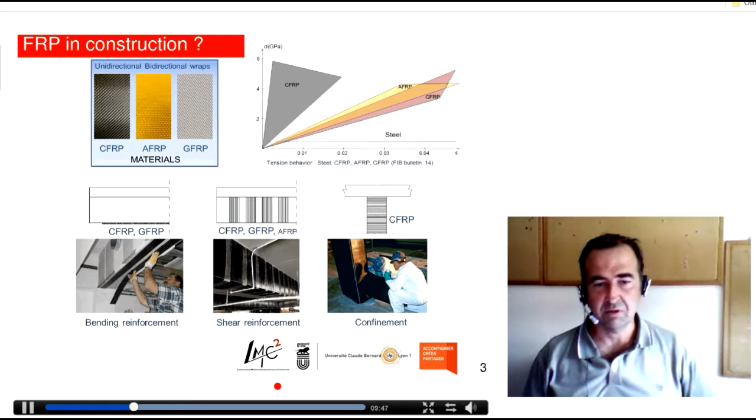So FLAX fibers are natural fibers and can be compared to some industrial ones that we all know, such as carbon, aramid, or glass fibers. The question we had a few years ago was to think about using these natural fibers instead of these well-known industrial fibers to strengthen structures for flexure, shear, or confinement. This was the aim of our research in this project.

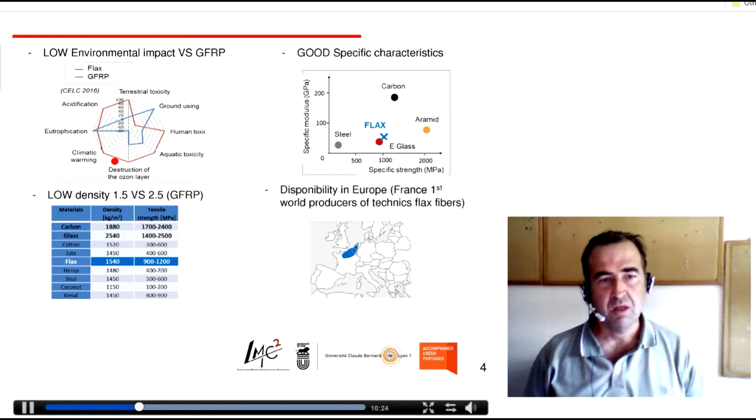So FLAX fibers, if we compare them to usual fibers, may be mainly compared to glass. If we look at the specific modulus, they are very light, a little less high with about the Young's modulus, but the specific strength is very high. Then, of course, they are less toxic and more friendly for ecology, since they are natural and produced very easily.

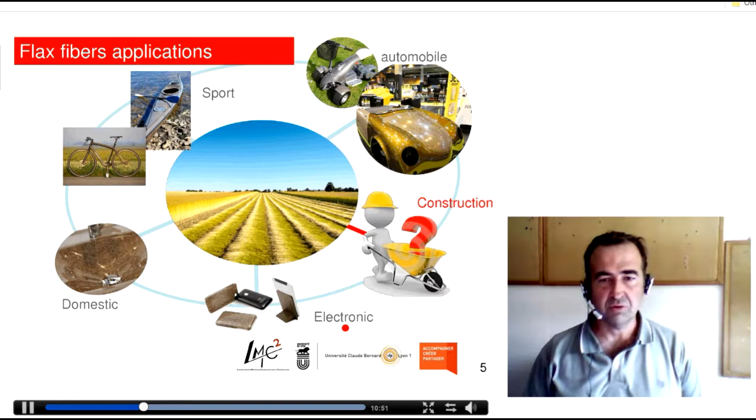Nowadays, these kinds of fibers are already used. There are some companies in France promoting this use in automobile, electronic devices, some domestic use also, and sports areas. Our aim was to think about using them in the field of construction.

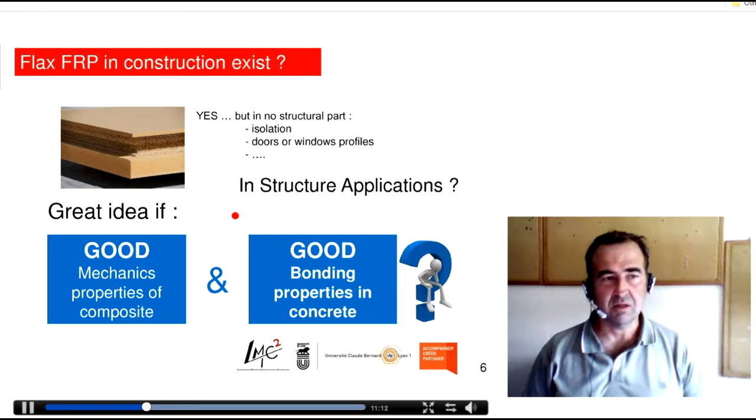So FLAX fibers can be good also, already used for insulation in this field, for doors or windows profiles - they are very light, used with thermoplastic matrix. But for structural applications, there is not so much use in this field.

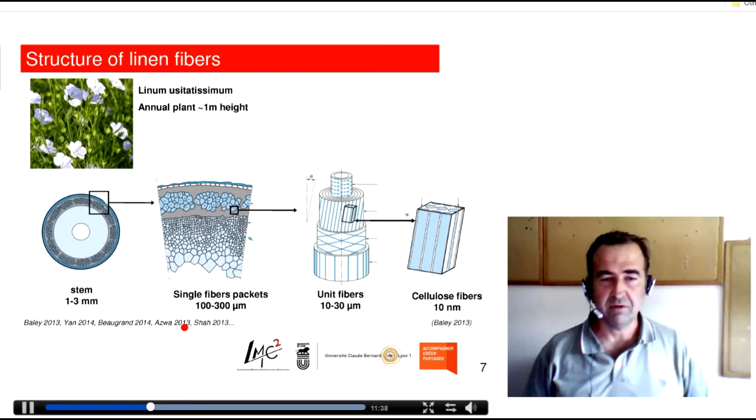These natural fibers are very specific and are already well known, for example, by Baley in the literature review. They are maybe compared with wood fibers. They are cellulose fibers, and this will modify their mechanical properties, and we will see this later in the webinar.

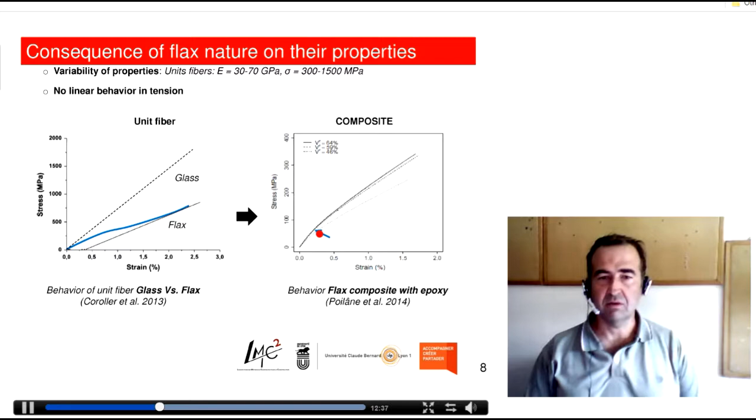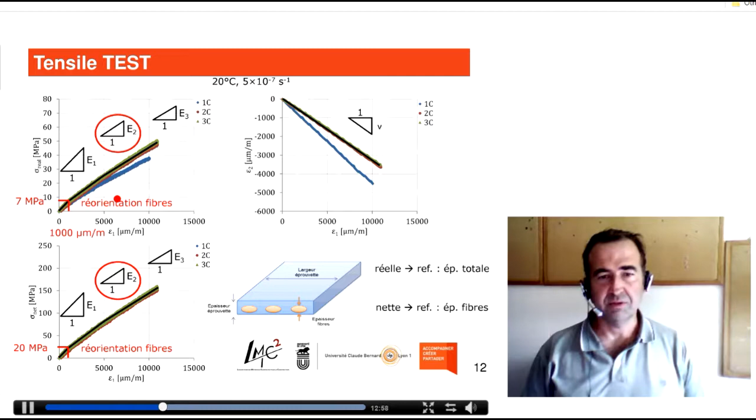What we've seen about the first part of the test we developed in the lab was to confirm this two-stage behavior for the FLAX fibers, and we also obtained several interesting results that I will develop.

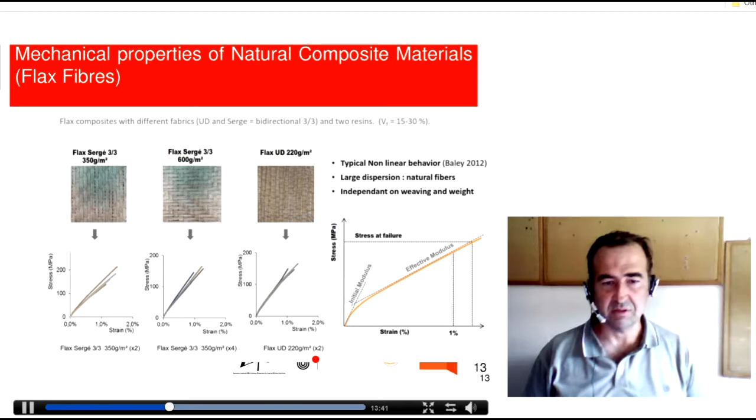All those fibers have been applied by hand layup method, and the global amount of volumic content is 15 to 30%. This is some photos about how the fibers look like, and what we get at the end is a Young's modulus about 11 gigapascal and a tensile strength about 170 megapascal.

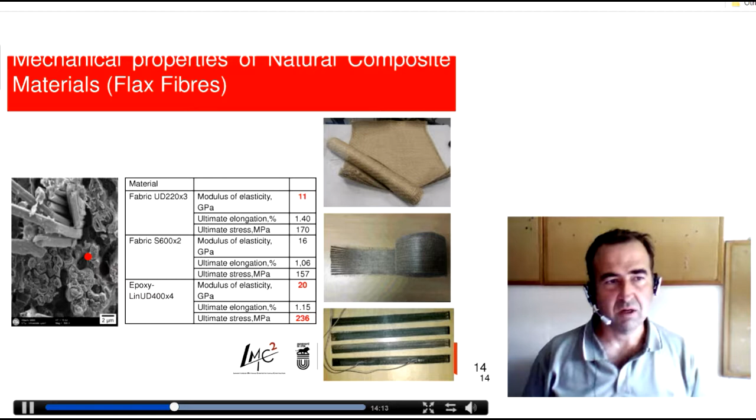You observe here that some debonding may occur of those fibers, and this obliges us to use two epoxy systems, one with a high viscosity and one with a low viscosity, allowing to bond this onto concrete.

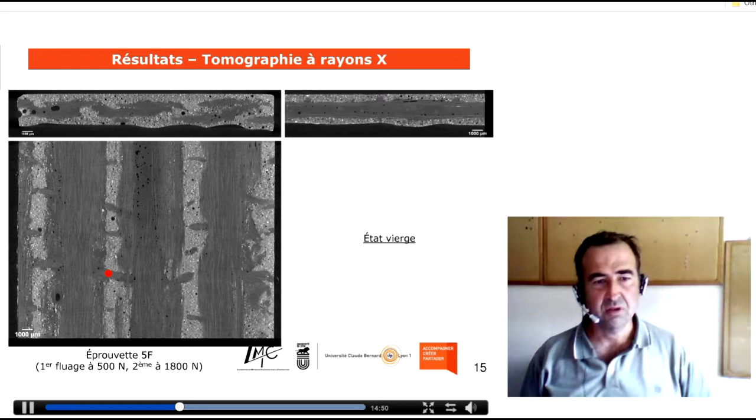If we use some specific way in order to look at what the composite looks like, what you can observe is that due to the hand layup method, there are a lot of voids in the composites, but you can also observe that many of the fibers are impregnated by the resin thanks to this system of two polymers - the first one which impregnates the fibers, and the second one which allows bonding the fibers onto the concrete.

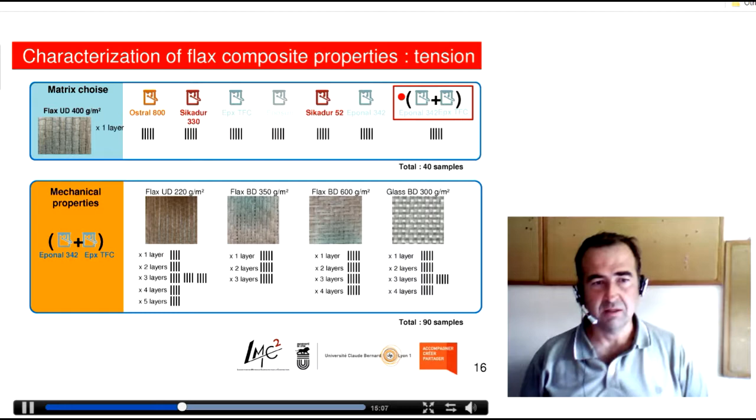So here you have several epoxy systems that we have tested in order to get different layers and optimize the best one. This was at the end the best system from which we get the mechanical properties, the higher one - mainly the different tensile strength. One first objective was to, depending on several layers, compare the different strengths we may have.

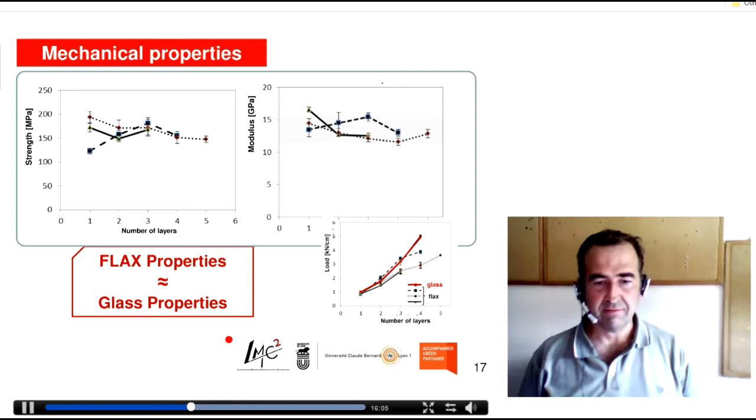What we observed is that we had tensile strength nearby 150 megapascal and the Young's modulus about 15 gigapascal. So in first conclusion, what we can observe is that flax fibers may be more or less comparable to glass fiber properties. If we observe here, this is very light glass fiber, about 300 grams per square meter, compared to the flax fiber composite we have in our study.

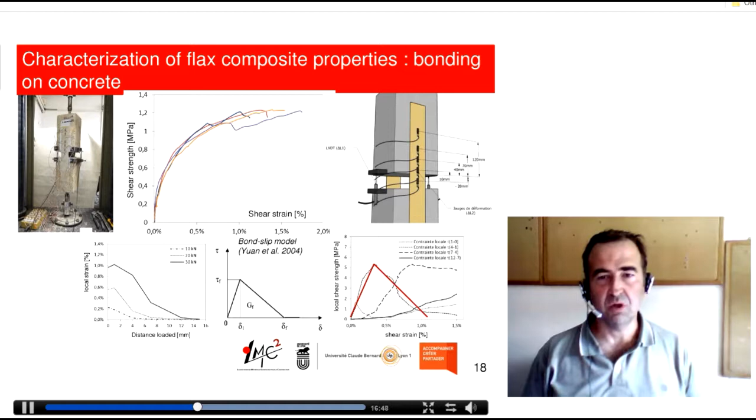Next stage was to evaluate how these flax fibers can be bonded onto concrete using this specific two-component matrix polymer used in our research. So we use a typical double lap shear test, and we obtain shear in function of bond slip. We can observe the local strain distribution, and then we compare this to usual local bond slip models obtained in literature. What we can say is that more or less the behavior is very similar to the one we can obtain with glass or carbon fibers, just the mechanical properties may change.

For example, what we compare is the ultimate load in function of the experiments we have, and compare this to the different models proposed in literature. Of course, we have to fit this since mechanical properties are a little bit different, but if we fit this, we are able to get more or less a very nice calculation of the ultimate load.

These have already been published by Lyon, one of my PhD students, in Composites Part B, and this is the title of the paper. You may find all the details about these experiments there.

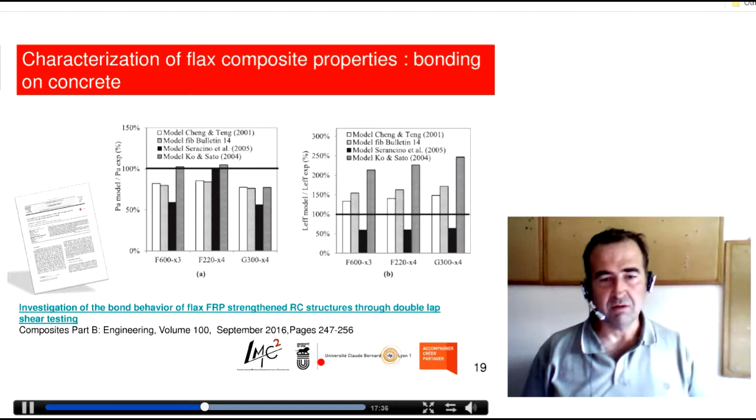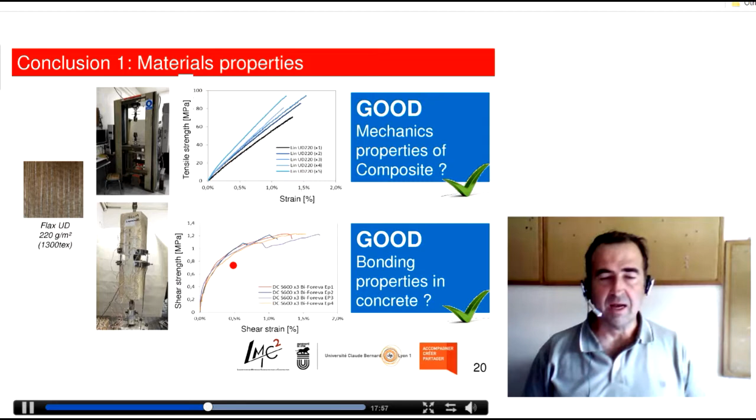So to conclude this first introduction, what we can say is that the properties of flax fibers, if you develop the composites well, may be very nice and comparable to the ones we have with glass. Bond is not a real problem on concrete, and we can develop higher levels of strength onto the concrete and low levels of sliding, so the behavior may be very interesting.

So the next stage may be to do the tests at the scale level of the structure. So in a second PhD, what we've done is a first study about shear strengthening.

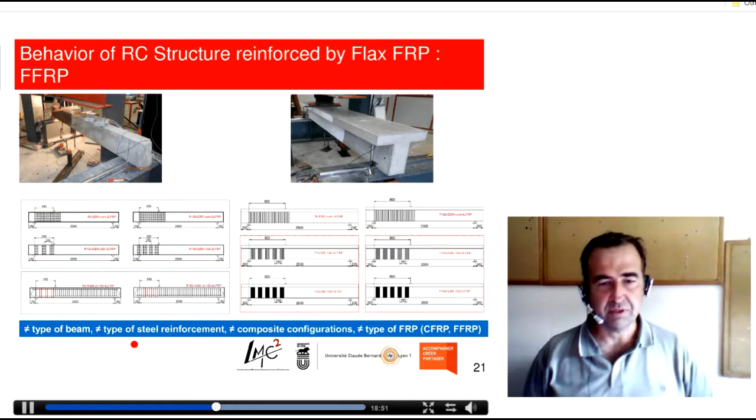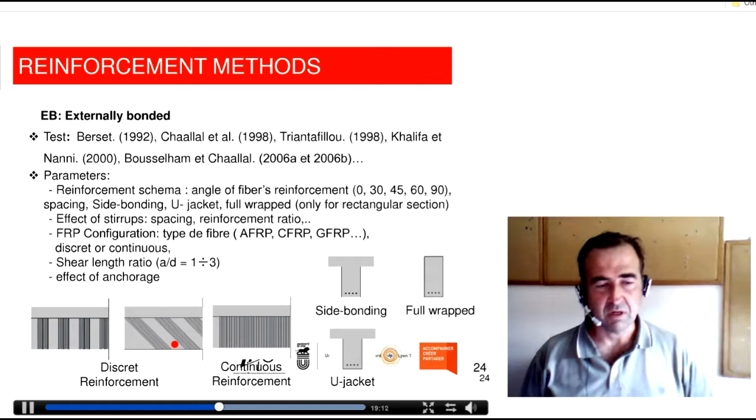We used two specific systems, a rectangular section and a T section, in order to evaluate the variability. We tested several different specimens, different spacing of the flax fibers, different width, and also a continuous strengthening, and we'll compare this to the carbon method. You all know that there are different strengthening systems, and in our study we mainly focus on continuous strengthening. We didn't focus on different inclinations or NSM techniques.

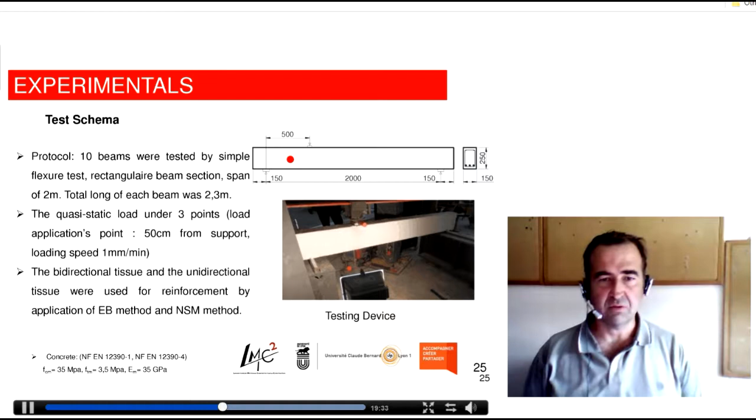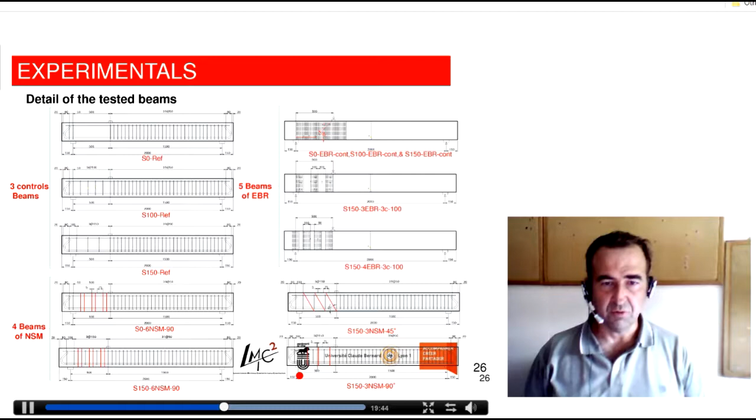So more details about the specimens we tested: 10 beams, 2 meter span, have been tested, loaded in this way such that we have a high level of shear loading in this area and less in this one, so that the shear failure occurs here. You have all the details about the strengthening in this slide. Of course, more detail can be obtained if you just send me an email.

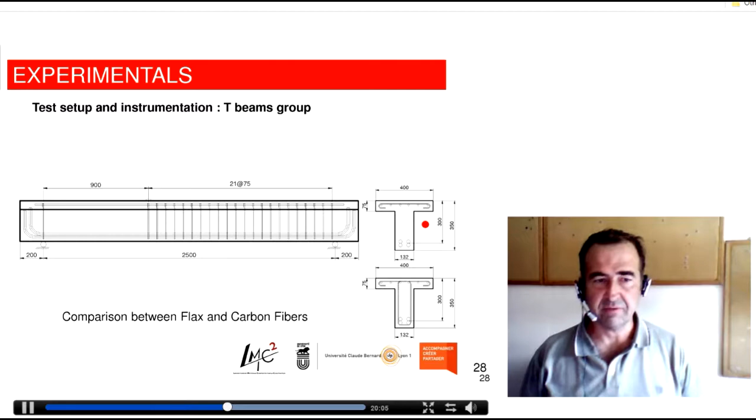We also evaluated the T section. For this one, it was a 2.5 meter span. The idea was to see the problem of debonding and to get a higher depth beam in this area.

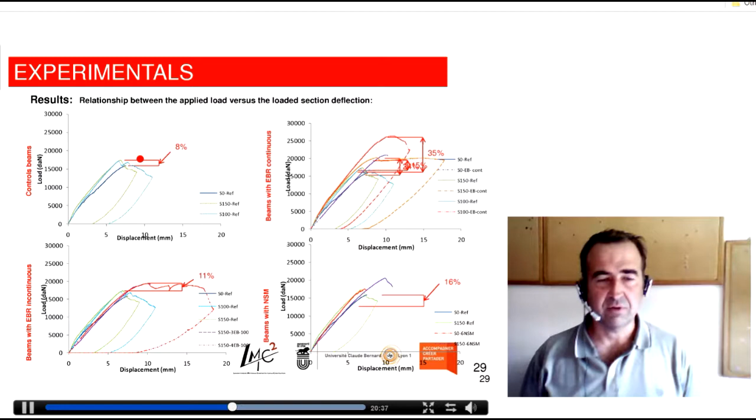As a result, if we compare the reference one and the strengthened one, what we can observe is that with continuous strengthening, the increase in strength is more or less very interesting, about 30% increase. But if this continuous strengthening is used with a very light, only one layer, the amount of increase in ratio is very low.

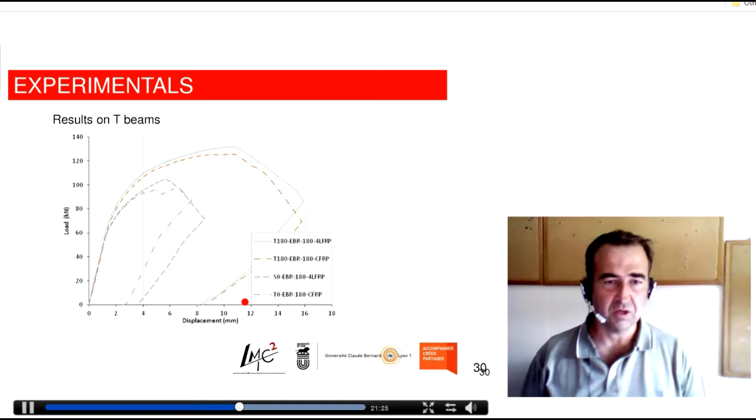And for the T section, what is very interesting is to see that this is the unstrengthened specimen with brittle behavior, and this is the strengthened one with external bonding with a thickness of 3 millimeters of flax fibers and also a width of 180 millimeters. What is interesting is to see that we obtain a very ductile behavior. The shear failure was not an issue anymore in this strengthening, and we increased about 40% of the ultimate load capacity of this beam.

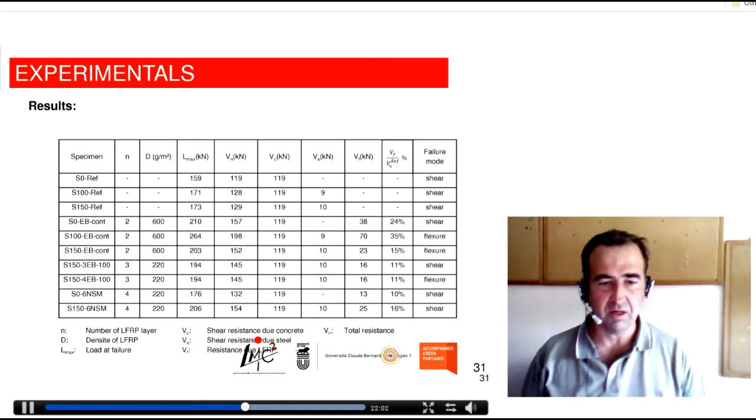And in some cases where the strengthening is very light, what we get is a very low level of load increase, less than 10%. Some photos about the shear failure.

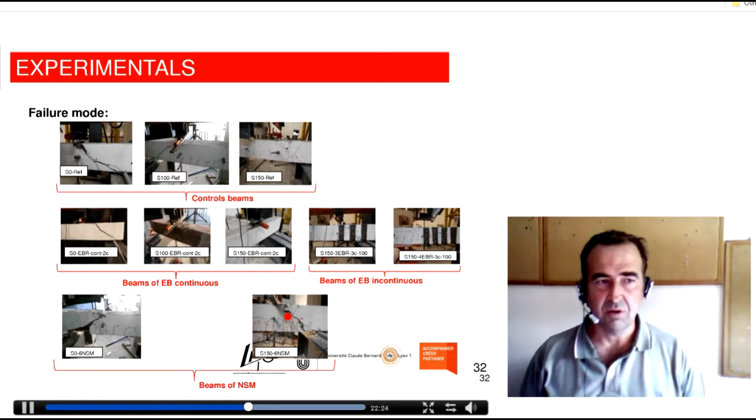You can observe here the cracking, specific shear cracking we have in different specimens. And one thing that is very nice to see is that we didn't get flax debonding, but we've been able

to get the failure in tension of the flax fibers. We then compared these results with different ones coming from literature, using CSA, ACI, FIB, or CNR bulletin, and the failure we expect to get with the flax fibers using the mechanical properties.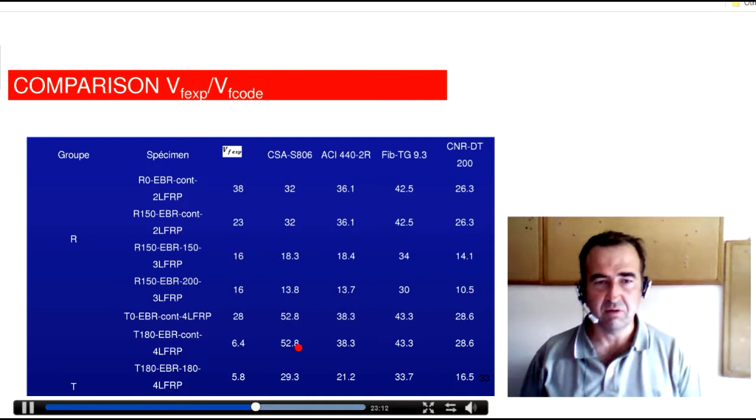And in any case, more or less only with the FIB bulletin, the estimation is very nice. With this calculation method, the load expected is higher than the one we get really in experiments. But in most of the cases, generally, the level of load is calculated as the one we have with carbon

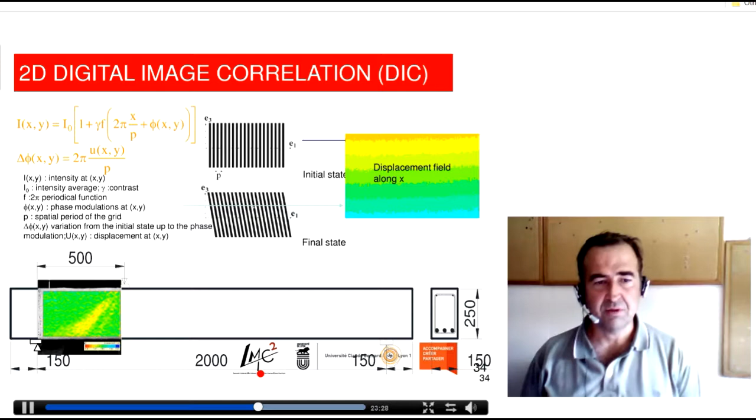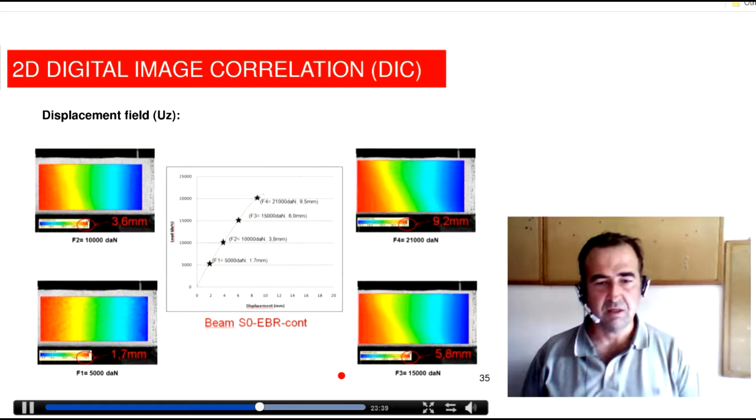fibers. So in order to better understand how the strain is distributed in the flax fibers, we use a DIC method in the cracking area. In this way, we are able to get strain and stress curves for different levels of load, obtaining in that way the different cracking pattern.

So what you observe here is we compare this also with strain gauges locally bonded onto the FRP system. And what you observe is that cracking propagates very nicely under the flax fibers, and then at the end we obtain the failure of the strip in this area where the tensile properties are the higher.

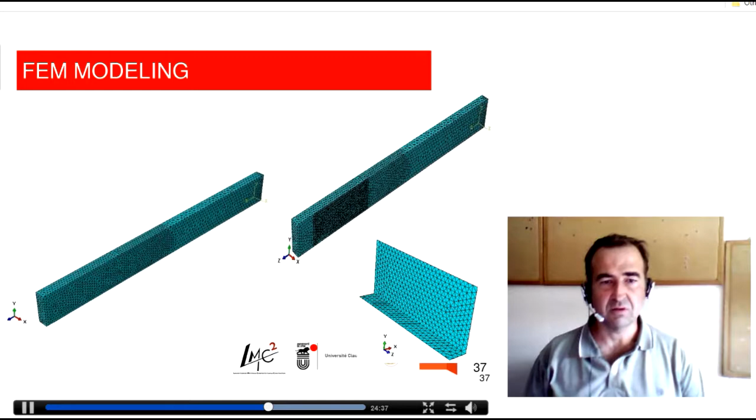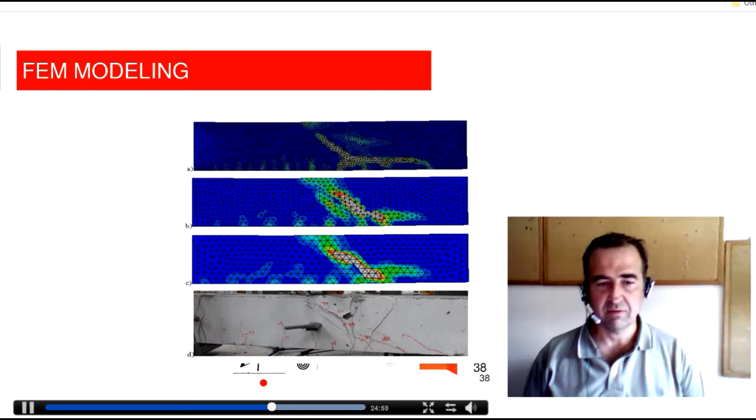To compare this, we developed some finite element modeling using plates for the composite area. The reinforced concrete beams were modeled using Abaqus software with internal reinforcement and a smeared concrete crack approach. In this case, we were able to model the crack, which was more or less very comparable to the one obtained experimentally. And you can observe here also the large strain we have with the experiment.

So with the strips, again, you can see here the comparison between the experiment and the modeling. This means that it allows us to get a high level of stress.

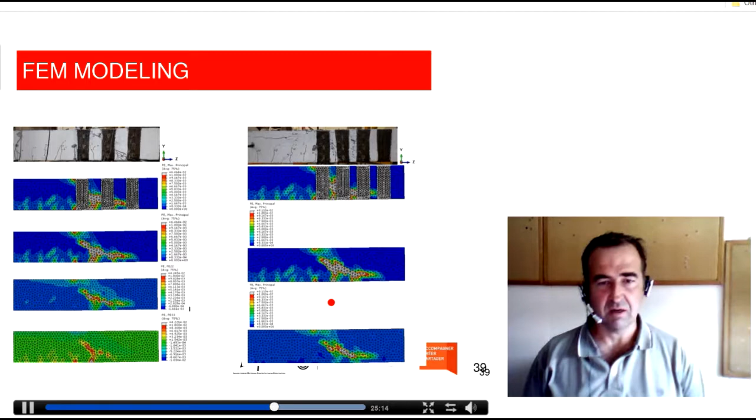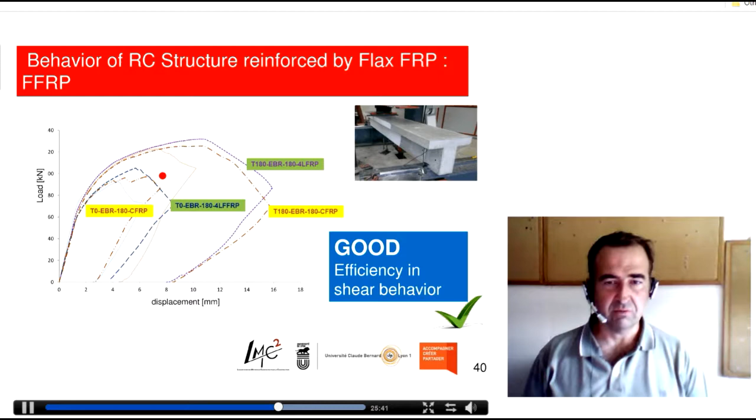So to conclude on this second stage of our research, what we can observe is that for shear strengthening, the use of flax fibers is very efficient. You can have a very important increase of the loading capacity, and it can solve the problem of shear for some reinforced concrete beam strengthening.

Third stage of our research, done in collaboration with Enzo Martinelli from Salerno University, was to evaluate the efficiency of such flax fibers for reinforced concrete walls for seismic retrofitting. The idea was to use such kind of fibers so that we can replace carbon ones for walls loaded by compression and cyclic loading.

So 6 walls were tested with carbon fabrics, using carbon fabrics externally bonded to the concrete. Anchors were placed in order to ensure the continuity of force between the wall and the basement. And for the shear wall, a small wall was tested in order to be able to get shear failure instead of flexural failure. 6 walls were tested with different configurations of carbon fabrics bonded onto the support.

For the flax fibers, we compared the use of 3 walls. There were 2 that had longitudinal reinforcement at the end of the wall, with two or three horizontal strips in order to avoid shear failure. And the third one was just strengthened by FFRP sheet on the entire support of the wall.

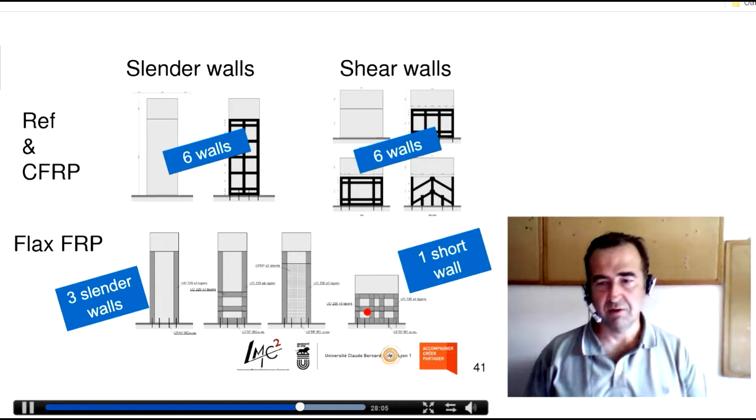In addition, we placed 2 strips at the end made of flax fibers in order to increase the flexural capacity and the shear at the same time. For the small wall, we only used 1. And as you can see, because the properties are lower than those of carbon fabrics, what we observe is that we have to put more flax fibers onto the support.

Then, the testing device is already well known. The loading procedure is quite usual for this kind of test. We increase the displacement progressively. The load is displacement-controlled, with a speed of 100 millimeters per minute.

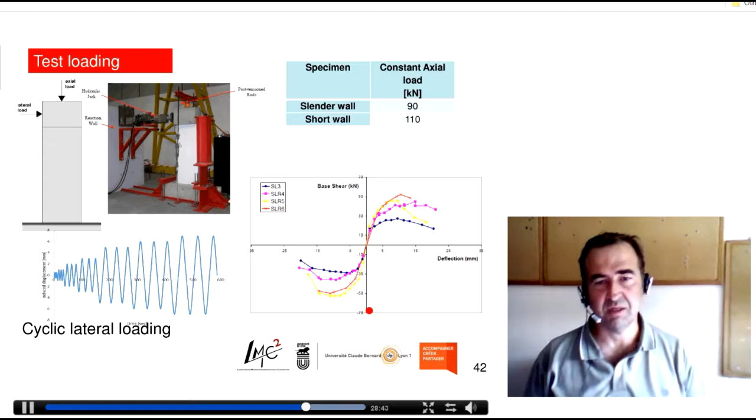Then a vertical load is applied via a hydraulic jack to control the vertical load, and a horizontal load is applied cyclically. Then these are the results we typically have if we look only at the maximal load and displacement for each level of the hysteresis curve.

If we compare the results, this is the reference specimen. You can observe a very brittle failure, mainly due to longitudinal cracks in flexure appearing at the basement of the wall. And when the wall is strengthened with FRP flax...

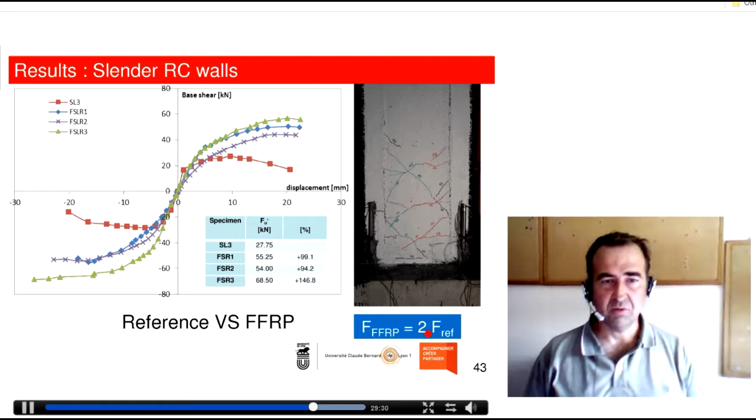You can observe a very important increase in the horizontal load capacity. And this increase, compared with the flax fibers, is very nice. We'll see that it's also interesting for dissipation capacity. At the end, we obtain a capacity thanks to a horizontal load which is twice compared with the reference specimen.

For the short walls, the increase is lower, but the load is very high. We obtain a 35% increase in shear, but what we get in this wall is a premature failure at the basement, with sliding of the wall between the wall and the basement. So we didn't get the real full shear capacity of the wall.

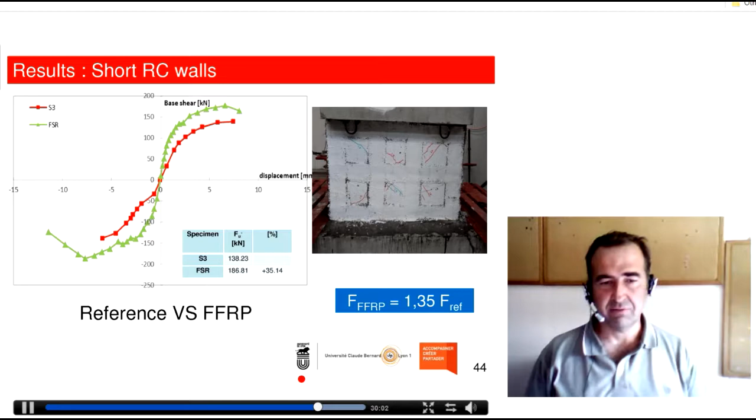Then to compare with carbon, as I mentioned, you can observe that the carbon wall was here, and the one in green was the one strengthened by flax fibers. And what you can see is that it's very interesting since we have an important increase in load, but also in displacement capacity, in compression and in tension, because we have push and pull tests.

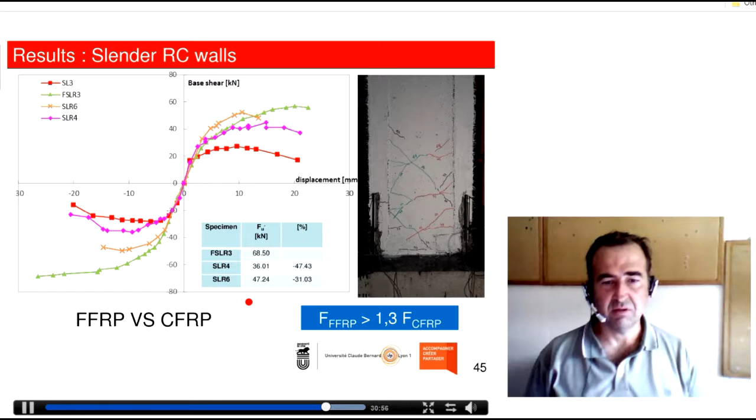So the test is very, very nice, and it's much nicer than the one obtained with carbon. In the carbon test, we have some debonding of the carbon due to the important Young modulus of the carbon. In this specimen, what we've seen is that the debonding did not occur, and we have very nice behavior until the failure. So this is the comparison for shear failure.

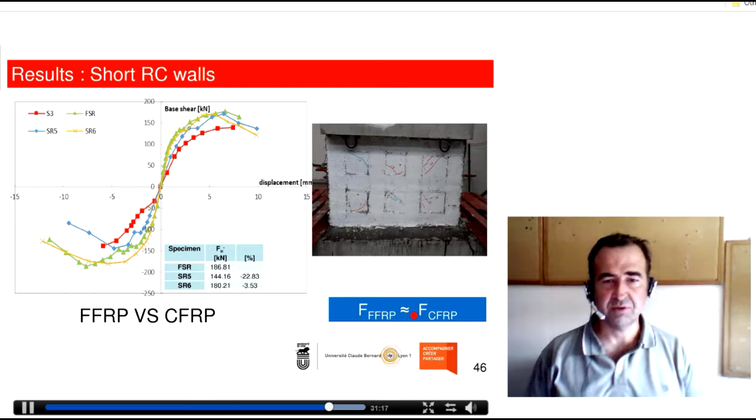What we can observe here is, again, the comparison is that it's very comparable to the one obtained with carbon fibers. So in conclusion, the flax fibers may be comparable more or less to the carbon one.

If we calculate the energy dissipation as a function of displacement, here is the slender wall strengthened with carbon fibers, and here the energy dissipation, total energy dissipation and elastic one. For the same level of displacement, it's very interesting to see that we have a higher energy capacity of the wall, more than 10%, 10 to 20% increase in the energy capacity of the wall.

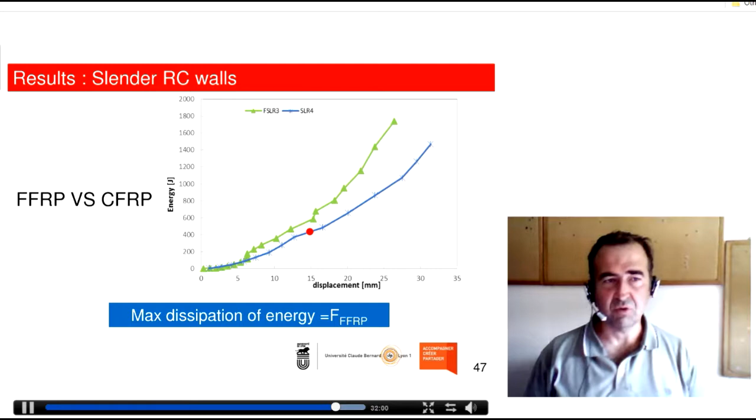It means that flax fibers are more suitable than carbon for seismic strengthening issues. In order to compare if this kind of flax fiber may modify the way that we calculate the wall, we use a usual calculation method developed, for example, in Eurocode 8 part 3.

What we have seen is that the contribution of flax fibers may be calculated more or less as for carbon ones, and that if you have the real mechanical properties of these fibers, you are able to calculate very precisely the experimental load capacity of this wall.

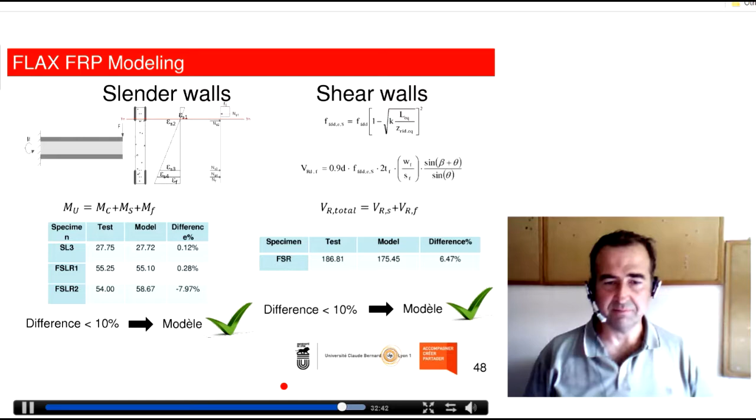So to conclude, flax fibers may be very interesting for shear strengthening of beams, and you can expect an increase of 10 to 35%, of course depending on the existing structures.

Flax fibers don't change the mechanical behavior of such beams. They can be calculated as usual, so flax fibers may be more or less comparable to the one obtained by carbon. The mechanical properties just change.

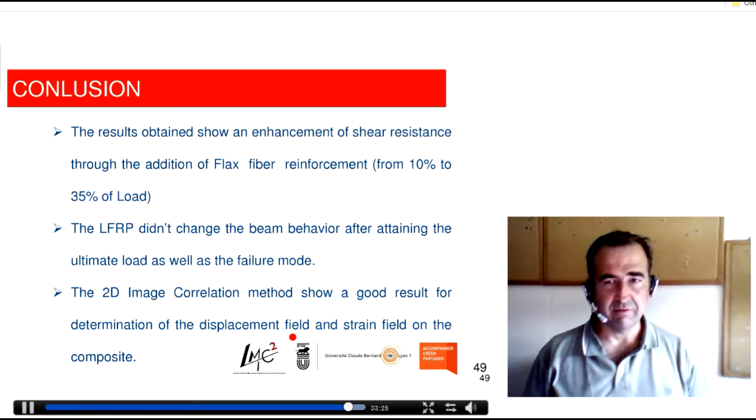It's some investigation we have to continue in the lab. Of course, those fibers are not perfect. There are still many questions about durability, fatigue, and creep.

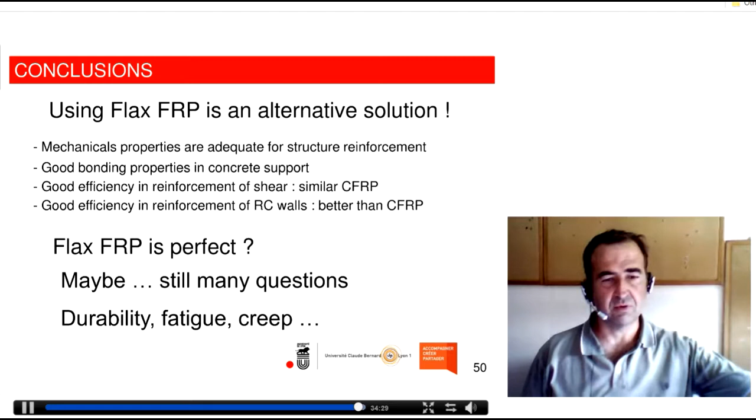We have already done some nice work on durability and creep, and they will be published soon. It seems that, of course, there is a decrease in mechanical properties, but then it's not really a problem for the use of such fibers.